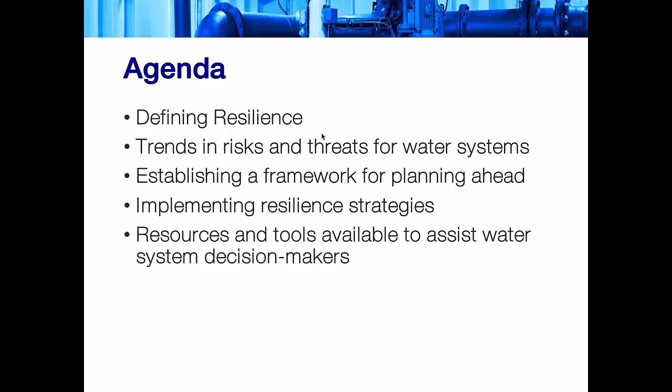Looking at some of the trends and risks and threats for water systems, and then looking at some ways to grapple with what it means to do resiliency planning. There's no silver bullet. There's a lot of different ways that communities can approach this based on what they need to do for their own resiliency and what they've done for planning in the past. And then we'll offer some ideas for implementing resilience strategies, and then I'll share a few resources and tools with you near the end. So truth in advertising, I've reworked this presentation for the hour webinar time frame today.

So if it seems like I'm not quite sure what the next slide is, it's probably right. So today for the purpose of today's webinar, I'd like to define resiliency as a community. A resilient community is one in which residents and institutions have the capacity to prepare for, respond to, and recover from events and trends with minimal outside assistance. And so really that means being able to plan for and adapt to any changes that may take place in your community with the tools and the resources available to that community.

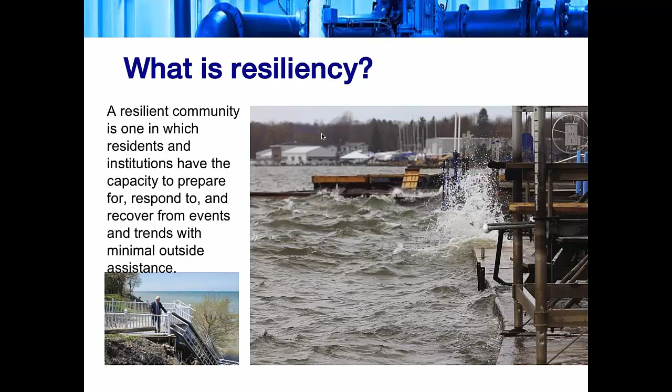There's a lot of things to consider when you talk about resiliency. So often, and even today with this webinar, we'll be maybe more water focused because of the purpose of this program, focusing on drinking water utilities and small systems. But resiliency means so much more than disaster or flood recovery or drought. And so there's a lot of things that community resilience can and probably should include.

So when you're assessing your resiliency, consider your own municipal financial health. How is your dashboard, so to speak, the ratio between revenues versus expenses, or looking at different parts of the community as far as the utility and different departments of the municipality. And then what's the community's financial health?

And so looking at the people that municipality serves. So looking at the business community, the economic viability of your main street, if you have a main street. What are the major industries, the major sectors in your community? Are you an agricultural community? Is it growing? Is it stable? Because the financial health of the community that you serve is a prime indicator of the financial health of the municipality. If your ratepayers are struggling, it's going to be hard for you to also make sure that your revenues cover your costs.

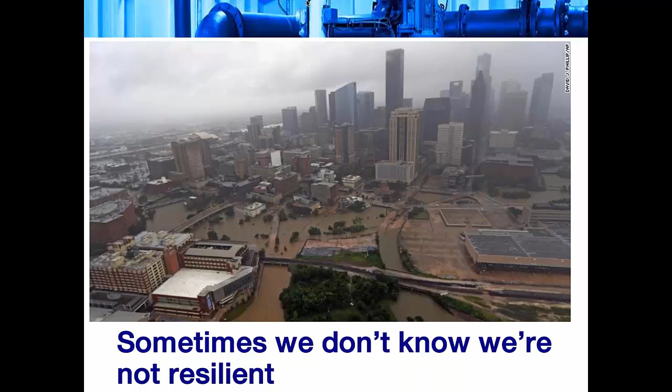And then when disaster does happen, a disaster could be an environmental one, like the picture we see here in Houston. But again, if a major employer leaves and you're the major ratepayer, the major tax base is gone now, that's a disaster too. It's just a disaster of a different kind, an economic disaster.

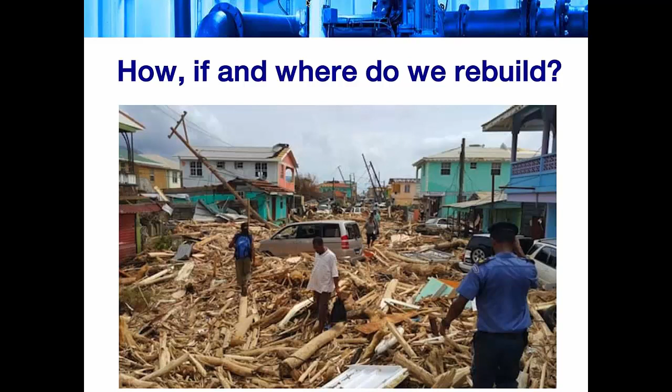So how, if, and where do you rebuild after these kinds of events?

Thinking about resiliency also means trying to get to the point where you're proactive in your resiliency planning versus being reactive to any kind of disaster response. Being able to be resilient means being able to think about different scenarios for the future of your community and your utility. And inherent in that is that waiting to be reactive is costly.

Reaction can be very expensive, and here are a few examples. We have Flint, Michigan, and their public drinking water system and its major failure, and the expense both in public health and in monetary resources.

And in the time that it's going to take to improve water quality in Flint. Oroville Dam, if you were following that last year, after significant drought and then significant rainfall, the failure of that dam in California, of course Hurricane Katrina in 2005, and the flooding in New Orleans. So there's a great cost to deferred maintenance and deferred planning for extreme weather events or any kind of occurrence that may happen in your community.

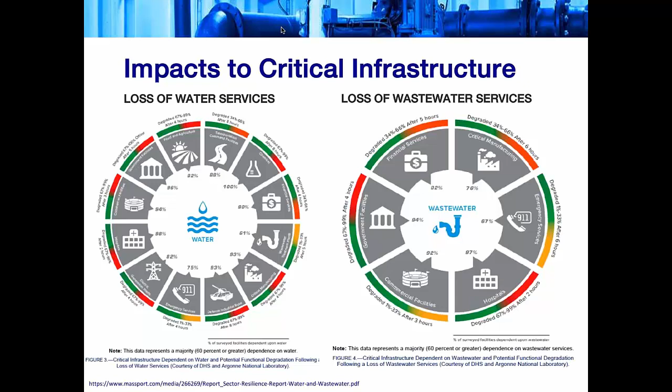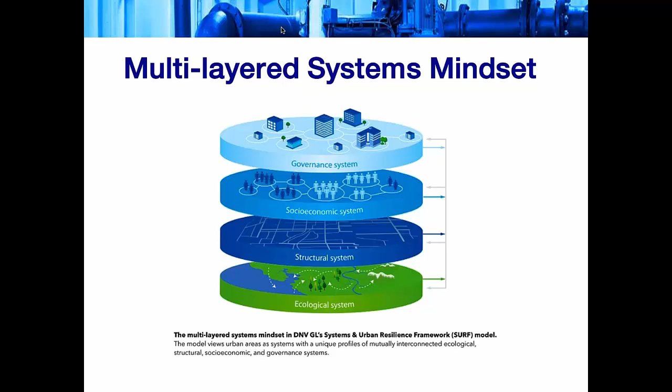When we think about resiliency, it's so integrated, it's hard to just say, can we make ourselves resilient to flooding? Maybe you can make your utility physically resilient to flooding, but if the homes and businesses in your community are also not resilient to flooding, and they're no longer able to continue to live there or need to move or businesses shut down, then you're losing your rate base. And that makes you less resilient as well. So really thinking about all these different systems and how one affects the other.

As I mentioned a minute ago, there's a lot of different ways to think about resiliency. I put this slide in to make sure I'm providing some balance, thinking about the integrated approach to resiliency planning that most communities should take. If we look too myopically at just making our drinking water plant resilient, we may be missing opportunities to provide further resiliency for the plant, for its operations, for the people who work there and who rely on that drinking water.

Ultimately to the benefit of the drinking water system. So at the top left, drought is a major concern, particularly in the far west. But you'll also notice in the northeast around the Great Lakes, there are some water stressors along the lake shores, as well as in the southeast, where water is sometimes contested. And then the economic resiliency of industry struggling, in the top right - what does that mean for the utility when business leaves, when people leave?

And then in the bottom, thinking about the threats to our public drinking water supplies. The bottom left is a picture of Lake Erie with harmful algal blooms. If you've not heard of harmful algal blooms, this is a type of algae that is toxic, toxic to the touch, and also fouls our drinking water supplies. And then, of course, accidents happen - this is from the East Bay in California, where there was an oil spill that threatened a public drinking water source.

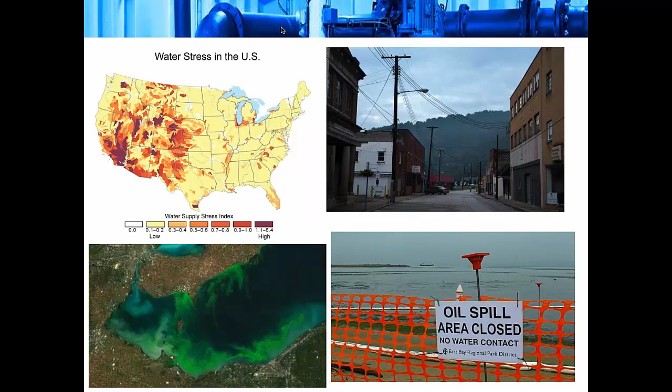So all of these things, depending on where you live and what your community is like, are considerations for resiliency planning.

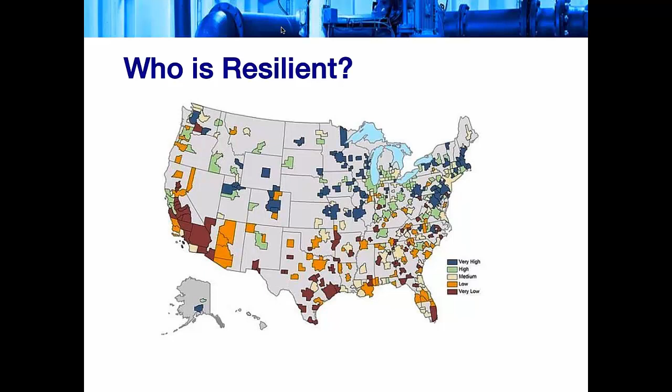Anecdotally speaking, you can see the most resilient communities tend to be in the north and the northeast, while the ones who are least resilient tend to be in the south and the southwest.

Here are the metrics by which they created this resilience capacity index that populated that map. They were looking regionally at economic capacity, things like income equality, economic diversification, the affordability of the region, quality of life kinds of things, and the business environment - is this a place where people want to come and do business?

The socio-demographic capacity covers educational attainment, the rate of disability, the number of people out of poverty and who have health insurance - again, quality of life kinds of things. These matter as much as the civic infrastructure and metropolitan stability, and the things that are essentially social services, public services provided to the folks who ultimately support them through rates and tax base.

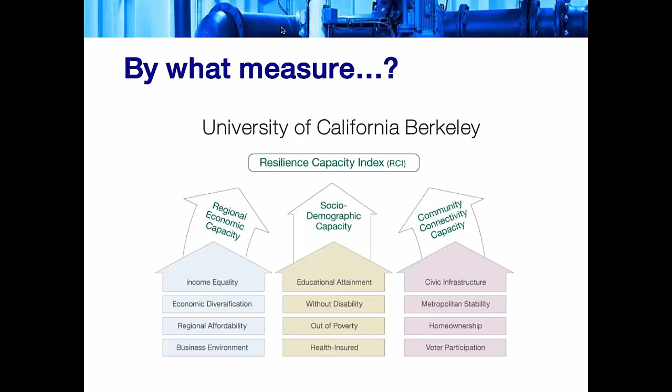So again, just one way to look at resiliency.

So how can you become resilient? One way is to start planning now for the future and recognize that the sooner your community moves through a resiliency planning process, the sooner you identify the kinds of implementation measures and strategies that could inform a capital improvement plan for a utility, and you can start to budget for those things.

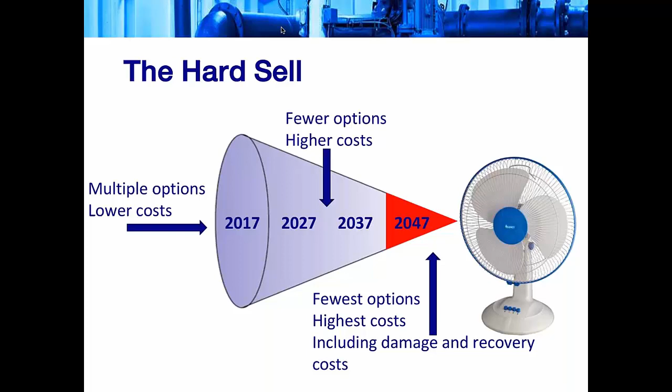I'd like to ask all of you, looking at comprehensive planning, zoning, asset management planning, and capital improvement planning - which of these does your community either conduct currently, or have you done in the past? And if you don't know or haven't done any, feel free to indicate that below.

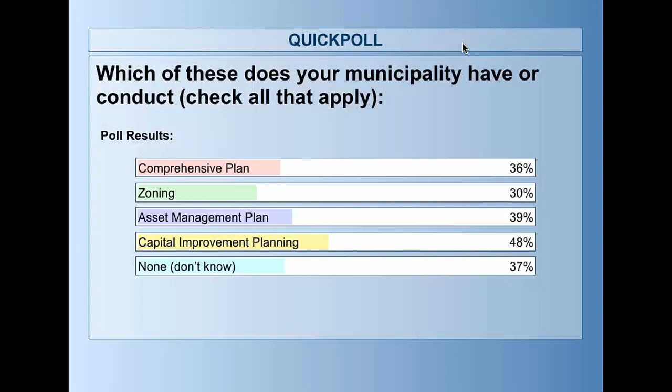For those of you who don't know or have none, I'd encourage you to start thinking about the kinds of planning tools that your community may need to support resiliency planning. I'll talk a little more about this slide.

The EFCs really do provide great technical assistance to communities through the planning process. I'd like to stop here for a second to let you know that we can help you identify the types of things you might need to do to construct a comprehensive plan - what are the values, what's the value of a comprehensive plan?

And then essentially putting that out to the public for their input, their feedback, and essentially their buy-in. Also the value of zoning - my colleague Heather Himmelberger does a great job with asset management planning and then land use planning. All of these things not only support resiliency, but can inform how you move forward with your resiliency planning. So things like zoning, comprehensive plans, and land use planning can be resiliency planning documents if written with that kind of frame or focus.

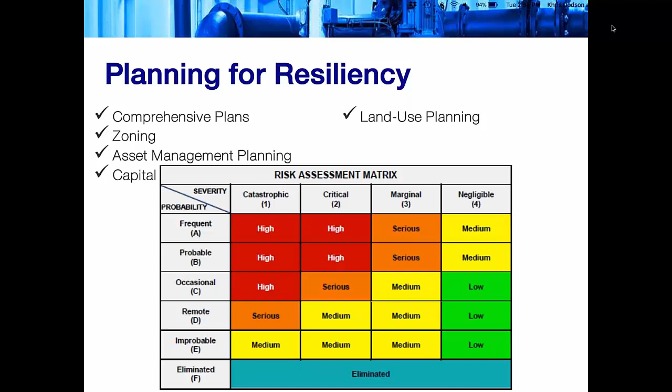So just another way to think about resiliency: identify the problem. What are we trying to make ourselves resilient against, or for, or toward?

It may be sustainable revenue in 20 years. It may be your aging infrastructure. It may be that you're experiencing source water contamination, supply issues, or extreme weather events that you need to be better prepared for.

So what are your vulnerabilities then? If we're talking about aging infrastructure, deferred maintenance, the rates that your customers pay, and what they need to be in order to begin to reinvest in your infrastructure. What kind of management system do you have for your infrastructure as far as asset inventory and replacement?

Investigate your options. Using a different example, if we're talking about source water, are there other drinking water sources around? Are there neighboring communities that you can essentially regionalize with, to work with, to connect to? So what are your other options?

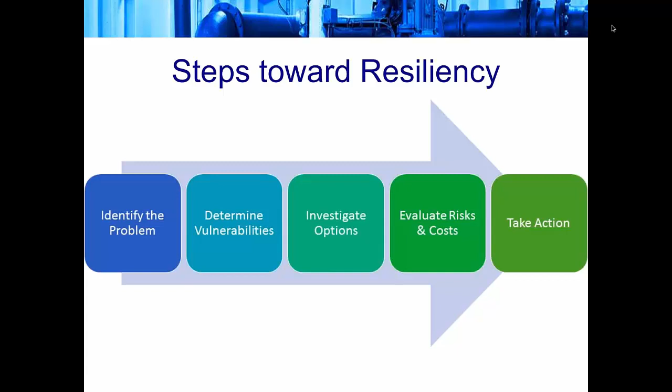Working with the agricultural community on nutrient removal in your source water. Then evaluate the risks to those options and the costs of each option. That'll really help you figure out the best path forward. And finally, then you'll take action.

Another way to think about resiliency: there's the 4 R's of resiliency. So redundancy—do you have that extra pump available should one fail? Do you have more than one viable source of drinking water? Do you have more than one fire station on this side of town?

There was one community we worked with once. They had one bridge over a creek, and that bridge led to their emergency services building and also the hospital in town. The first time they ever experienced a significant flood, it washed out that bridge, and they realized how vulnerable they were because half of the town couldn't reach the hospital, and the emergency services providers couldn't reach half of the town because the bridge was gone.

So redundancy, and then robust. How much support do you have when you need to attack a problem? What kind of resources do they have? How quickly can they respond? You may feel robust because you have neighboring communities that you can rely on, but can they be there quickly? So things to think about.

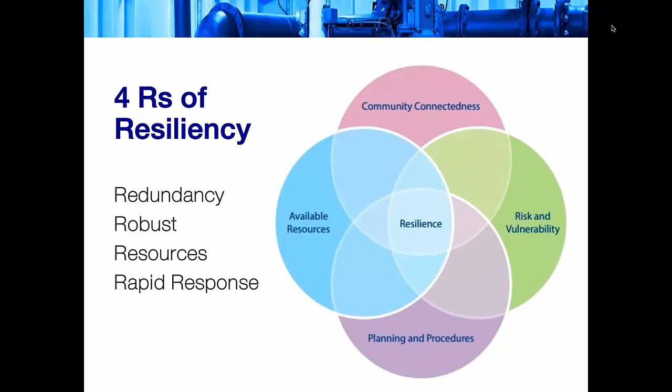I want to switch gears a little bit here. Oh, I just realized I missed the poll question—oh well, anyway, I want to share a few experiences from some communities that will segue into talking about one of the tools that the EPA has created for us.

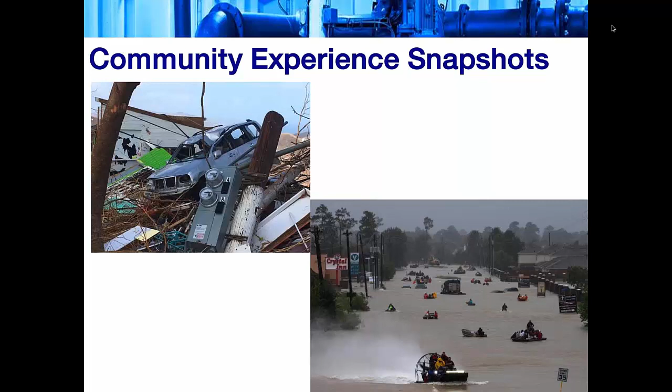Here's a couple of examples of what's happened recently. In the bottom right, we have Houston, and in the top left, we have the Virgin Islands. Thinking about where they should go from here from a resiliency planning perspective, considering some of the questions that we raised earlier.

They're doing great work in trying to make themselves resilient because they see that they're in a vulnerable position.

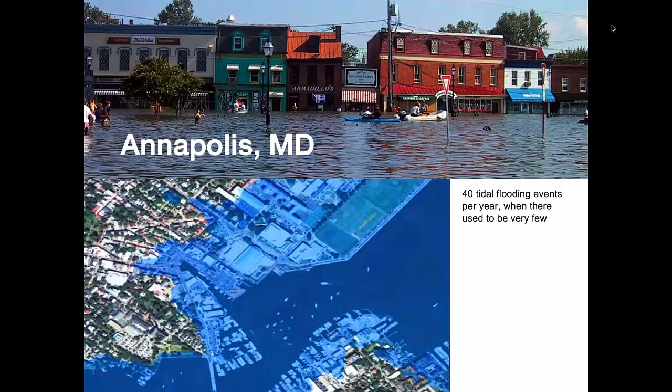After 2006, the entire hospital was shut down. This was a major community vulnerability for Binghamton when a third of your hospital services are essentially gone.

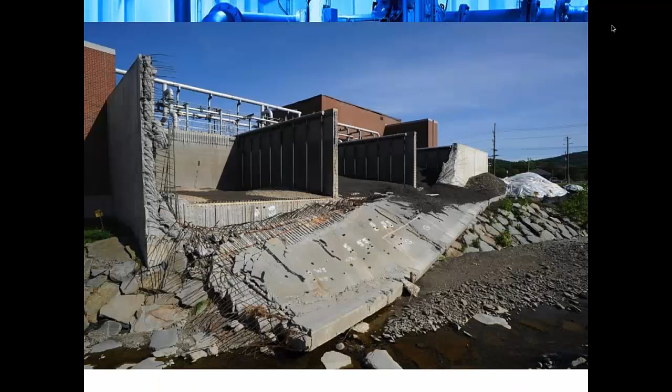What happened in one of those floods was that one of their treatment tank walls was clearly significantly compromised, and all of the treatment media was washed away. The treatment media is not inexpensive for those of you who deal in that.

Not only did they have this catastrophic collapse with their treatment media washed away, but they were unable to treat sewage for quite some time. So there was quite a bit of raw sewage in the Susquehanna River until they could make their repairs.

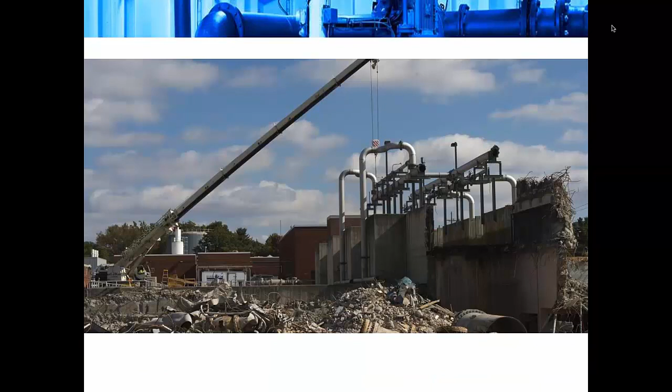As they were making repairs, they realized how vulnerable they were, realized they weren't resilient, and realized the impact on the economic viability of their community. The Binghamton-Johnson City area is only about 150,000 people, which may sound large to some of you, but to support such significant infrastructure improvements did mean significant community investment.

Also there was the environmental impact of having a sewage treatment plant fail in a relatively vulnerable water body, because the Susquehanna River feeds the Chesapeake Bay, and of course nutrients are a big deal there.

So they decided to work with the EPA on the EPA's Climate Resilience Evaluation and Awareness Tool, the acronym is CREATE. It's a risk assessment tool looking at risk, focused on helping utilities adapt to extreme weather events and better understand where they're going and plan for future conditions.

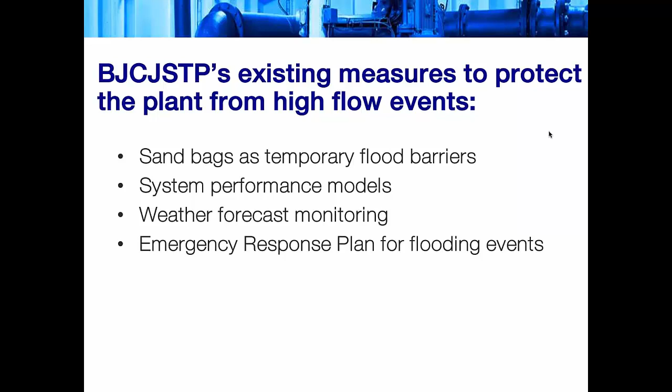Just a slight plug for the EFCs, this is where we would come in and help you identify ways to pay for that cost, either through state or federal funding programs or through existing local sources.

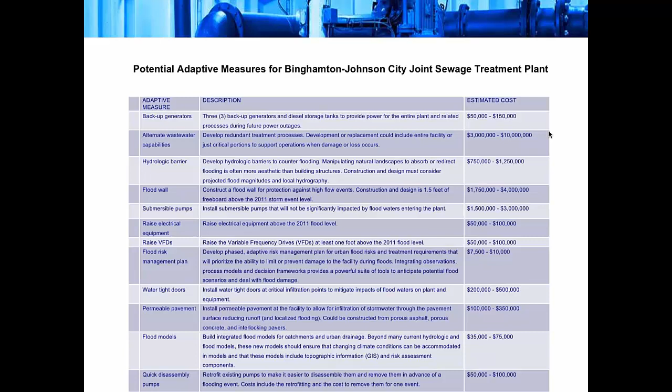I think this is a really cool tool that the EPA has developed, and it's one of many, many resiliency tools. Again, it's something we can help you identify which tool is right for you based on your utility, your community, and your resiliency concerns.

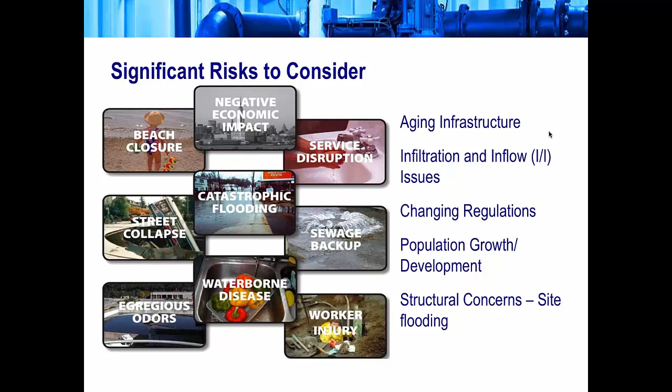So other things for communities and utilities to think about: risks to consider include flooding, backup, street collapse, odors, beach closures, negative economic impact, infiltration and inflow, changing regulations, and structural concerns, not dissimilar from the one we just saw in Binghamton.

But focusing on the plant alone is not enough. You need to be looking at your distribution system. That's part of the asset management process: inventorying your system, looking at your manholes and their condition, your hydrants, your pipes, your valves.

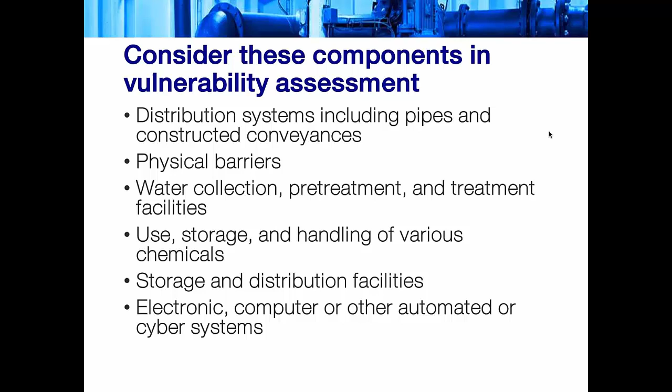Conveyances for wastewater, what physical barriers are there, your water collection, pretreatment and treatment facilities, chemical use and storage, storage and distribution facilities, and any electronic, computer, or automated systems you may have that help you manage your system.

Now I want to talk a little bit about some of the planning frameworks that are out there. CREATE is certainly one that gives you very specific utility-based things to implement, but there are other ways to think about planning for resiliency.

This is developed by NOAA, and this is a hyperlink to the NOAA site.

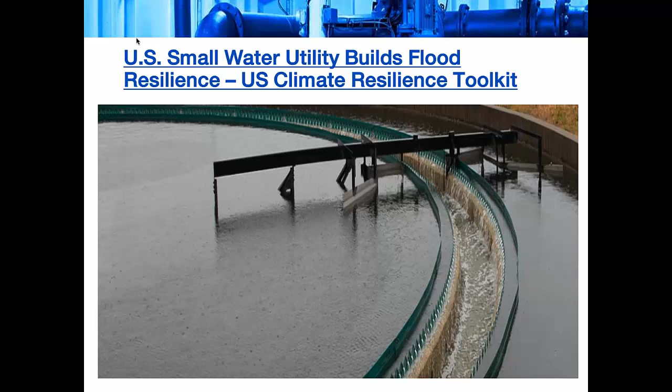So you could go through there, and for some reason I'm having trouble doing it now on my machine. But if you would click through that link, you'll find the NOAA website that has the U.S. Climate Resilience Toolkit. This is focused on small water utility systems. CREATE is one great tool, but this is another tool designed directly for small drinking water systems. Savannah is sending out the link through the chat box if you want to check it out while I continue, or it's a hyperlink you can peruse when we post this webinar on our website later. Lots of good stuff there to take a look at.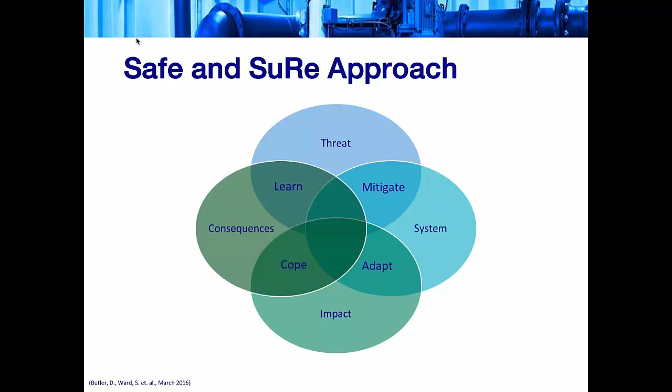There's one other planning process I wanted to briefly share, called the Safe and SuRe approach. This is probably about the 13th Venn diagram you've seen in this presentation, but it was developed by some folks just last year and I think it's worth considering. These subsequent slides are great prompts for you to think about the threats for your community, the impacts, and considerations for resiliency. Essentially the Venn diagram has threats, your system, the impact of those threats on your system, and the consequences. So we'll start with the threats.

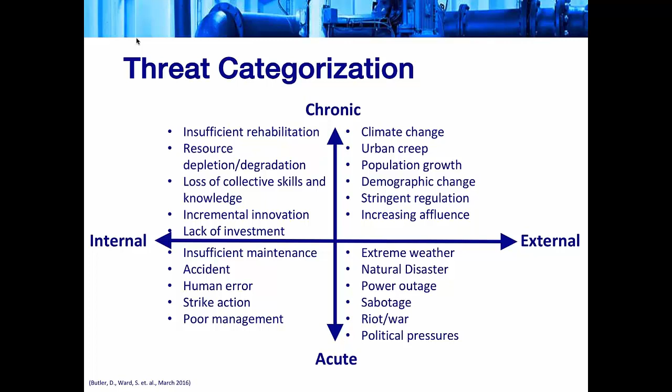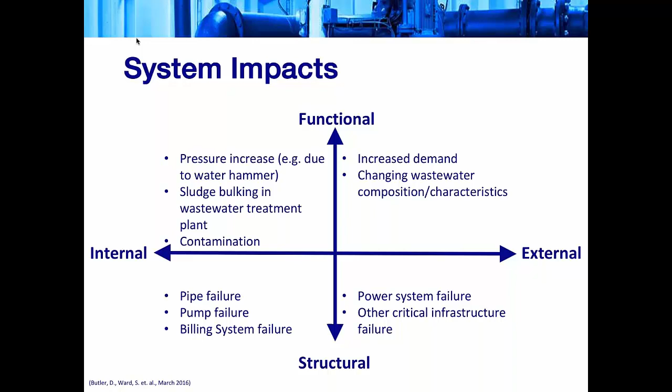So the threat, and then the system impacts. We have internal and external, and then functional - operations, maintenance - and structural, the physical infrastructure itself. You can see some examples: pipe failure, pump failure, power, increased demand, changing composition, contamination, etc.

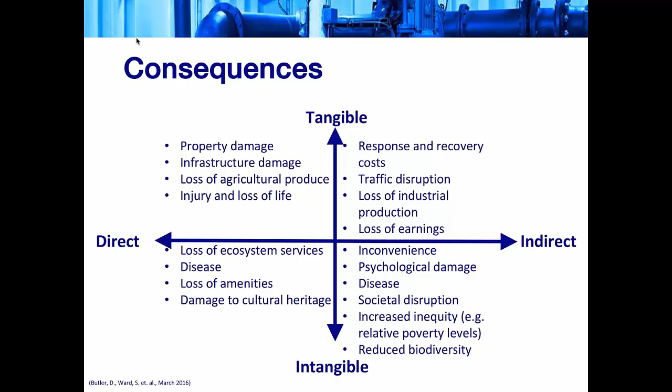Then what are the consequences? We have direct and indirect - things that directly affect the utility or the community, depending on what scale you're planning for. And then tangible and intangible. Intangible things are things you can't necessarily physically touch or see, but they can be measured and they do have an impact: loss of ecosystem services, damage to cultural heritage, societal disruption, psychological damage. Just knowing that you're without water or power, or that a major event is coming or has come, creates psychological damage and societal disruption - things you can't touch, but you know they're there.

So you've created those four quadrants and populated them with things that make sense for your community and utility, then you go back and try to create actions based on some of those. There are different types of actions - we're learning from this experience, mitigating the damage from this threat to our system, or adapting and coping.

Looking at the example of mitigation, and the threat of insufficient rehabilitation - essentially not being able to invest quickly enough in our infrastructure - the action is to accelerate the asset replacement strategy. That may seem like a no-brainer, but the process to get there could be intense for some communities. It may mean a rate increase, a lot of negotiation with the town board, or hiring an outside consultant to create an asset management plan for you, in order to be both efficient and effective in which assets you replace, in what order, at what time.

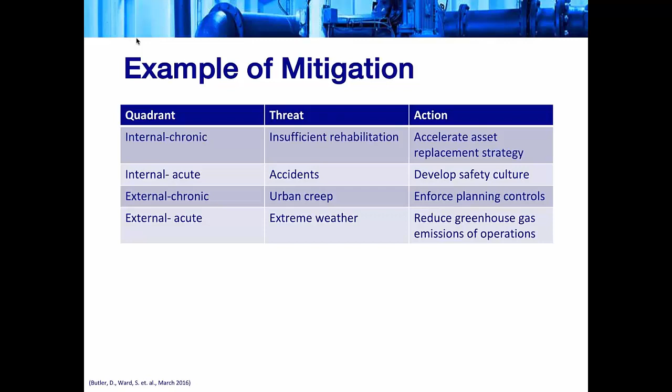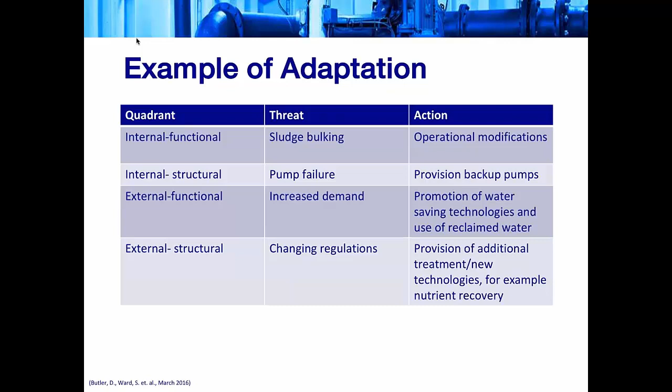Adaptation. You see some examples here of the threats that were identified and actions that the community or the utility can take. And then coping. This is when something has happened—you've had a major flood event. Now's not the time to do an asset management plan. Now's the time to cope with where you find yourself without drinking water, without a place to live or do business. So property damage, temporarily relocate, spread of disease, boil water, et cetera.

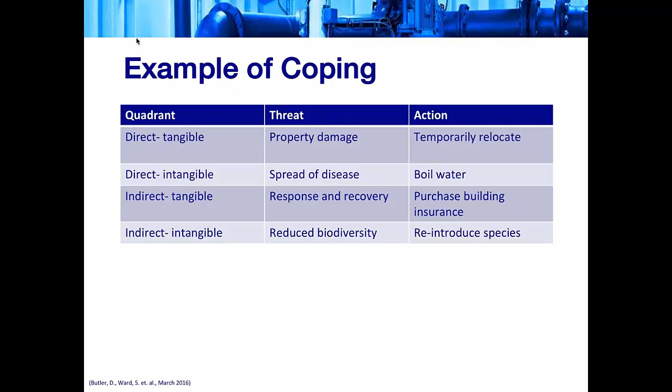I think this is a great tool for communities to consider, even at the very beginning stages of thinking about how we can be resilient and what we don't know about our own community. We'd rather find that out now around this table with this matrix than waiting for a disaster, economic or environmental or otherwise, to come and point out to us how we're not resilient.

A few other ideas for implementing resiliency strategies, coming out of that matrix system: looking at flooding impacts and considering regional interconnections. The redundancy is so powerful. I've been witnessing some communities in upstate New York begin to share services, but more than that, share water infrastructure. There's 9 towns around Chautauqua Lake in western New York that have created a shared water utility. It's not its own authority, it's a shared water utility, and they're working together to administer it. It's taken them several years to put together.

They realized they had to, because their water quality was not getting any better, and it was kind of outside the purview of the communities to do anything about it. Alternative power supplies, solar panels, other kinds of things—again, having redundancy in the connections. Being able to monitor and inspect infrastructure, that's part of asset management planning, part of being able to plan through capital improvement planning on what needs to be replaced or rehabbed and at what time. Elevating or flood-proofing assets—a lot of communities find this out the hard way. And then also joining a mutual aid network like WARN.

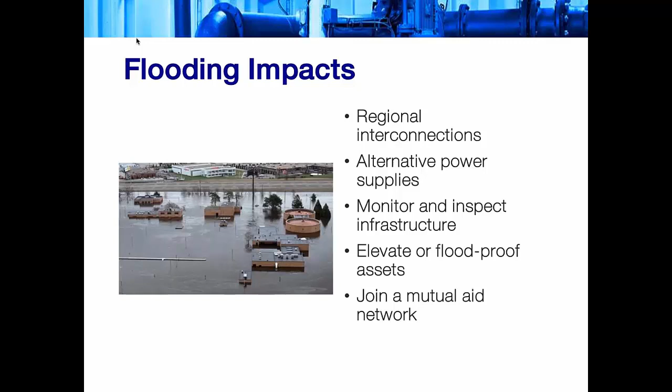Maybe it's seasonal, for changes in seasonal runoff—monitoring that, looking at snowpack and runoff changes, putting those predictions into models, updating drought contingency plans. If you've been following what's been going on in California the last few years, they had several years of drought followed by several months of significant rain. It did replenish some of their water, but it also caused a lot of damage—the Oroville Dam is one example—but some of the trees were just falling over because they had drunk up so much water that they became top heavy. Who would have expected that?

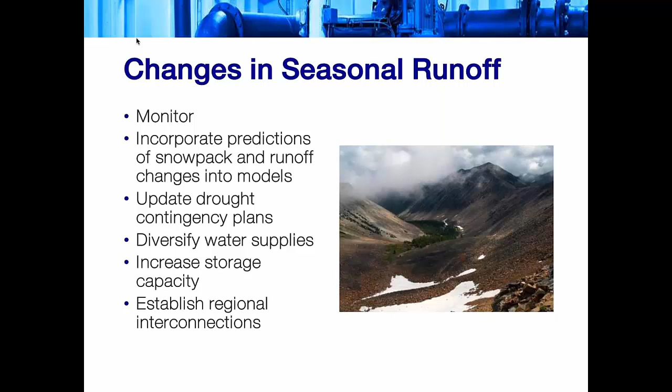Diversifying water supplies, increasing storage capacity, and again the regional interconnections. Looking at runoff, particularly for waterside communities—looking at green infrastructure, naturalized infrastructure, ways to slow down, spread out, or soak up the stormwater through a distributed system, investing in watershed management. If you're a coastal community or a community on a lake shore, you should be invested in what's going on in the watershed above you, upstream, because it has an impact on your community.

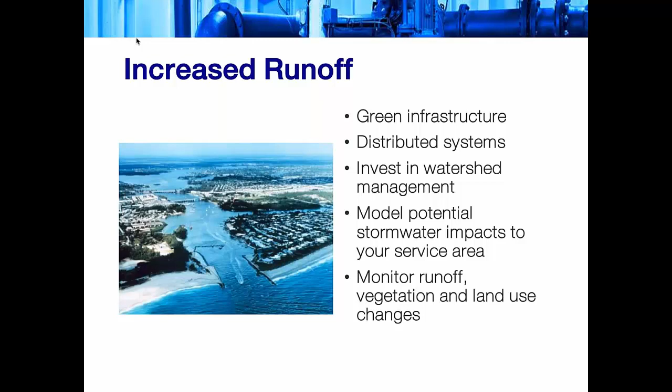Modeling and monitoring, and then looking at stressed sewer systems or water systems. Some of these are more focused on the sewer. Green infrastructure, again, keeping the stormwater out of the system. Looking at existing ecosystems and using them to the benefit of your system, diverting stormwater to green space, essentially using the green space as storage during storm events. New York City is doing this with some of their parks after the hurricane they experienced.

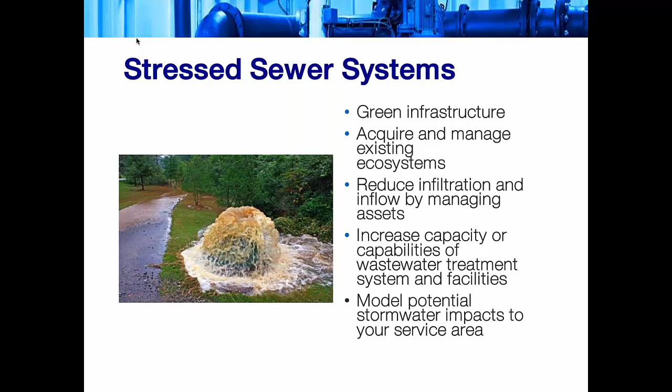Reducing I&I—infiltration and inflow—again, by better managing your assets, doing asset management inventory, but also working with the private sector. A lot of the laterals on private property are part of that infiltration and inflow challenge. By doing that, you're increasing the capacity of your system. By removing the I&I and the stormwater, you actually have more space in your system to clean the water that needs to be cleaned and to prepare for the need for that capacity during significant events. And then modeling the stormwater impacts to your service area as well.

We've been talking a lot about water and utilities, which is the focus of this program, but thinking about the community and economic impacts as well, and thinking about things you can do to show your value to your community. We hear an awful lot of discussion about infrastructure at the federal level these days, and rarely hear the word pipe or pump—it's always airports and bridges and roads. Those things we can see; we can't see pipes and pumps all the time. I think sometimes our industry is forgotten by the people who pay for it. So getting out there, letting them know what you're doing, that you're serving them, that you're trying to use their money wisely to provide a good quality product is part of that. But also, listening to what they need in order to stay viable within your community.

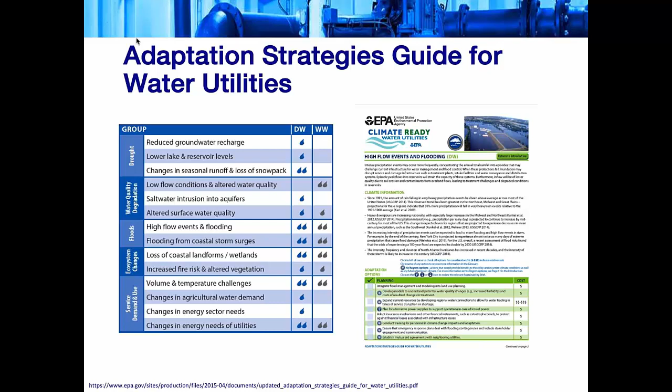But here are some that I think are particularly good for small drinking water systems. So the EPA has created this climate-ready water utilities guide, and the link is at the bottom. It's a PDF, essentially adaptation strategies for water utilities, and it allows you to figure out what conditions you're facing and how best to manage through them.

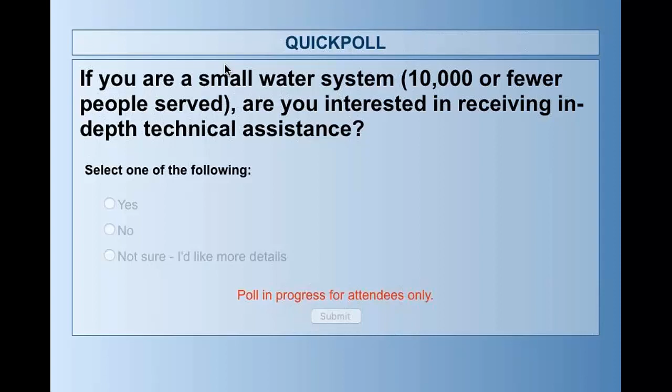It looks like we have a few questions. An attendee asked, what do you recommend for outside consultants to assist municipalities and also work with the Environmental Finance Center? So I take the question to mean an outside consultant, like an engineering firm, working to both assist municipalities and the Environmental Finance Center.

We often work with, I wouldn't say hand in hand, but very closely with environmental consulting firms who work with communities. Often, but not always, environmental consulting firms aren't able to do some of the financial planning that we do, so we add value to whatever project they're providing to the municipality. Sometimes we become the conduit—we'll be working with a community on the planning process, and at the end they need a product that only an engineering consulting firm can produce, and we'll help them evaluate proposals from different consulting firms to get what they need.